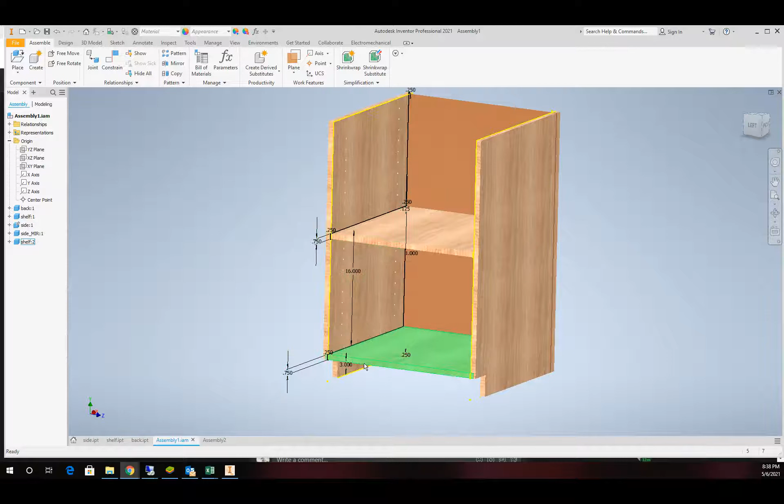So what we have is we're going to make a profile cut all the way around our side. We have some dados or some pocket cuts that we have to make for the back and the two shelves. And then we have some holes in here that we're going to drill out. So we'll have three different toolpaths to accomplish this. And so that makes the modeling a little more challenging, but nothing that we can't handle and get accomplished.

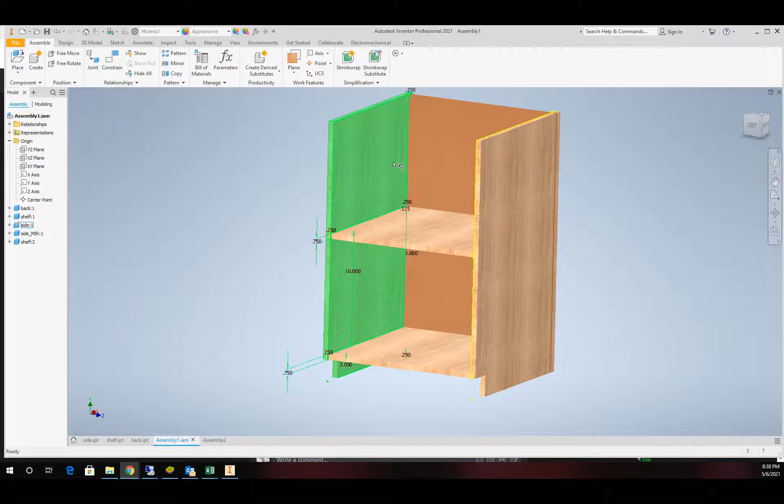All right, so I've created the assembly here. This is all the parts fitting together. Let's go ahead and take a look at the main component, which is the side here. So in the side, I have basically just drawn up a rectangle. Then I knocked out a hole over here and put some pockets in here and in the back, and then did an array or rectangular pattern to create the holes.

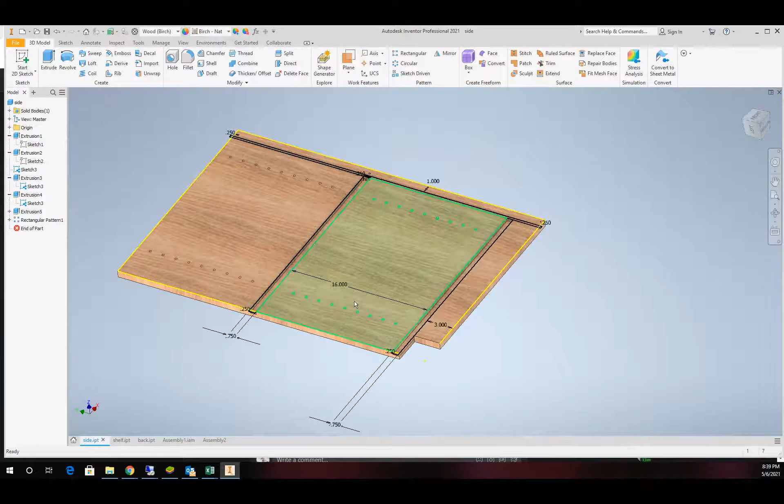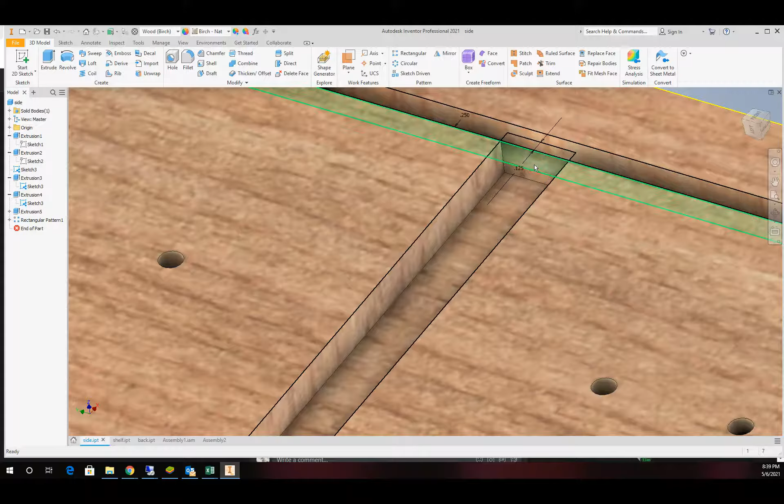So nothing too difficult. My dados are half the distance of the material, and my back dado is a little less. It only goes 1/4 inch down, or about 1/3 of the way through the material. And so that'll give us something a little more interesting when we make two different pockets. And it also lets us deal with what we're going to do right in this area on the pockets with the tooling. Okay, so the modeling is pretty straightforward, except I want to highlight a couple areas here.

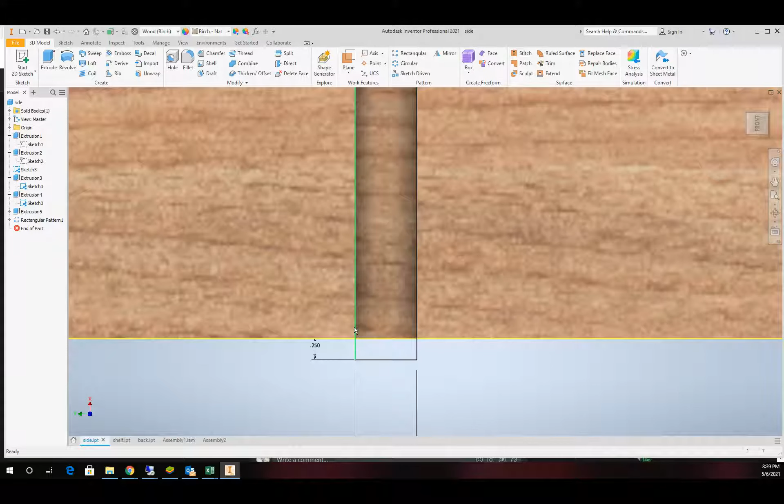For my pockets, I extended the closed group here a distance equal to my toolpath. I need to be at least half the diameter of my toolpath, but I went full width. That way I don't have to worry about it stopping short, and I can create a nice clean pocket with a crisp edge right here on the edge.

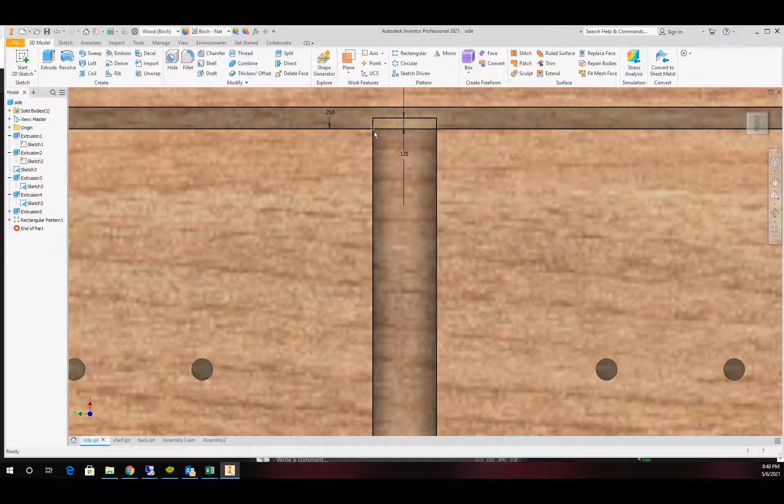I did the same thing on the back, but I had to make a decision. Which one do I want to go deeper? I chose to allow the shelf to go into the back, even though the back isn't as deep. I can hide that and make sure that my edge lines up perfectly here. If I didn't, I would have rounded this little part off, a little bit of that thickness difference between the two pieces. So that would have left me some other choices to deal with. Holes are pretty straightforward, and we're in good shape.

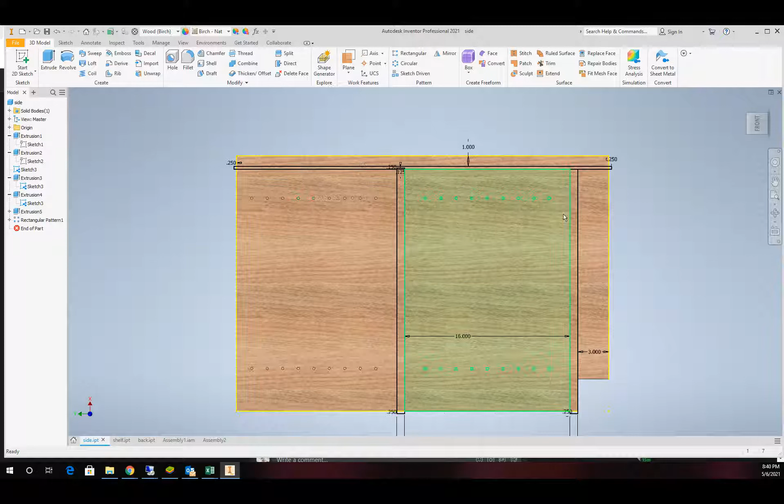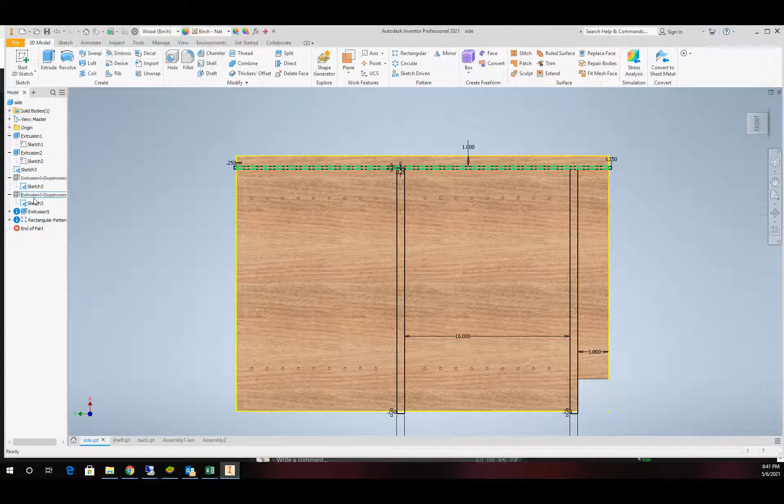All right, so before I continue on, I'm going to take my extrusions for those and just suppress them. Okay, that way I'll leave the sketch, which is sketch 3 here, which includes all of my pockets that extend beyond the body here. But I don't want to bring over all of this geometry. I don't want geometry on top of geometry. And that's really all I have to do.

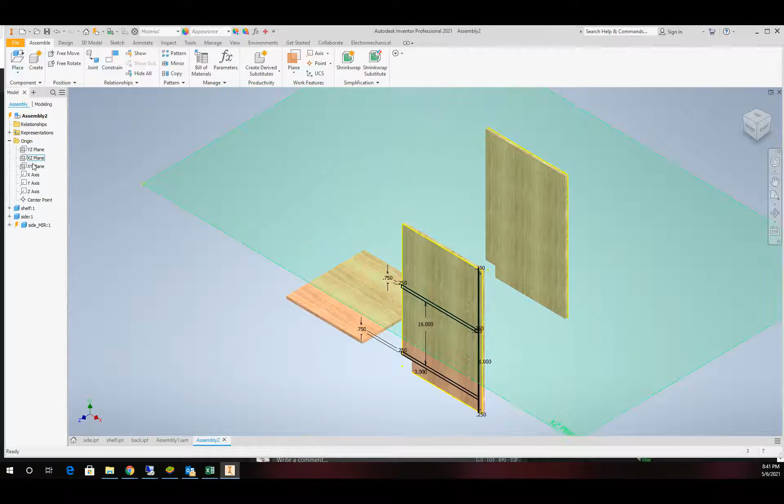So I'm going to go ahead and start up another assembly file. And I'm going to place in the pieces that I need, which will be the shelf and my two sides. Okay, once I get them in, I'm going to find an origin plane, make it visible, and I'm just going to constrain these pieces to lay them flat on there.

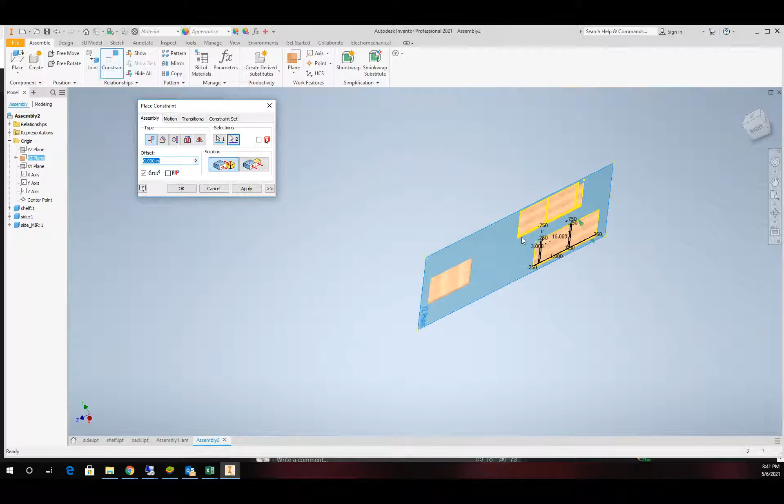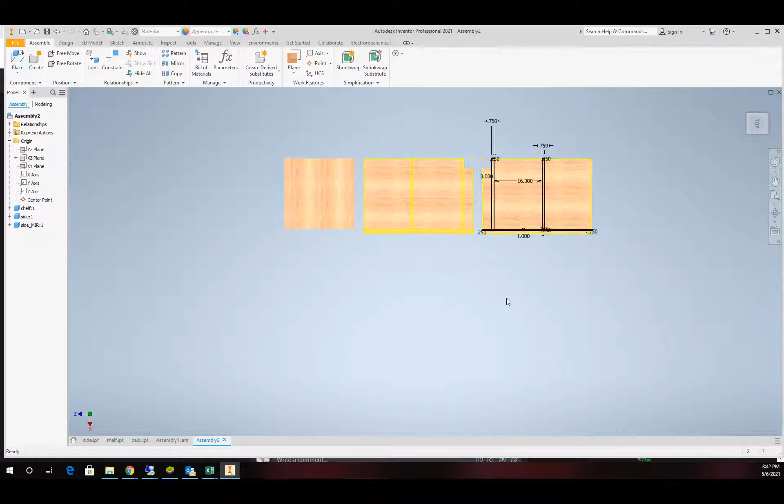I'm going to let VCarve take care of nesting, so I'm not going to get overly carried away with getting these organized and using the least amount of material. I just want to get them kind of flat on here. Okay, and that takes care of that. We'll turn the visibility of this off, and I can see my pieces.

All right, so at this point, very similar to some of the other videos that we've done, I'm going to take a plane and offset it off here at a distance. Doesn't really matter. And then I'm going to create a part. I'm going to call it cutfile.

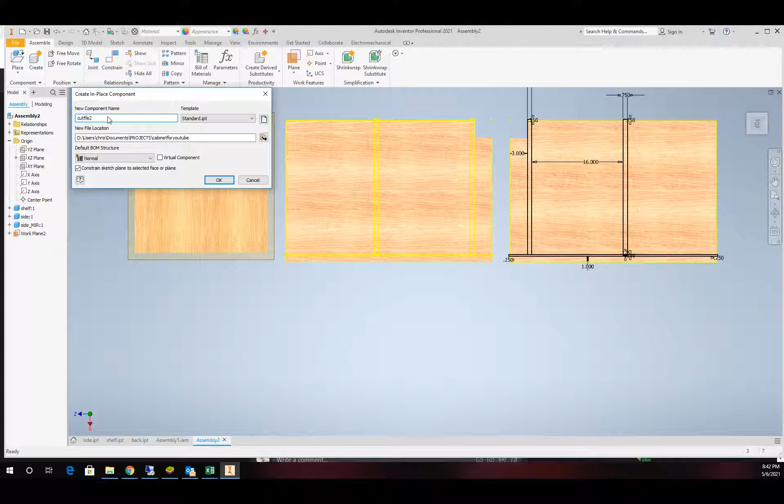Click OK, I'll place it on that work plane. From here, I'm going to create a sketch on that work plane, and then I'm going to project geometry.

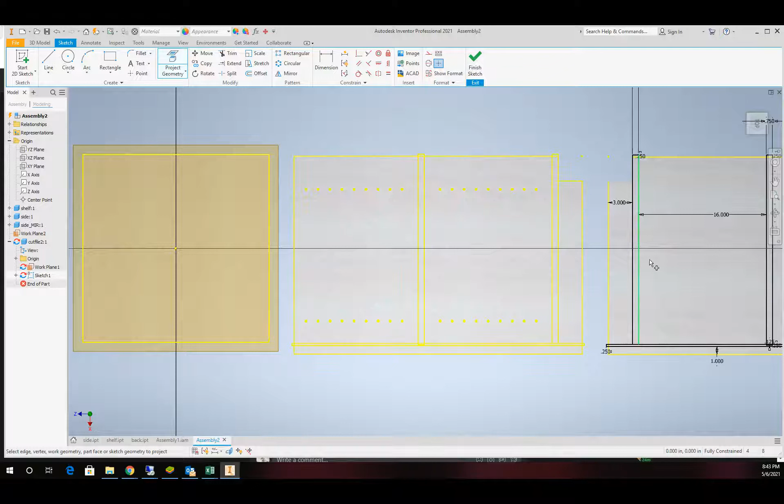So we'll start off with the shelf, then start with the body of this piece so I get the holes. Do the same thing over here. And I want to make sure I get my pockets as a closed body so I can see I don't have them there. So we'll go ahead and grab those.

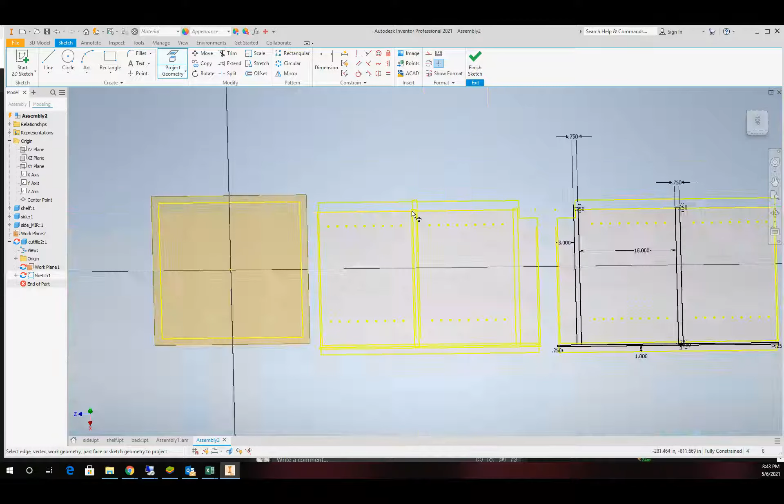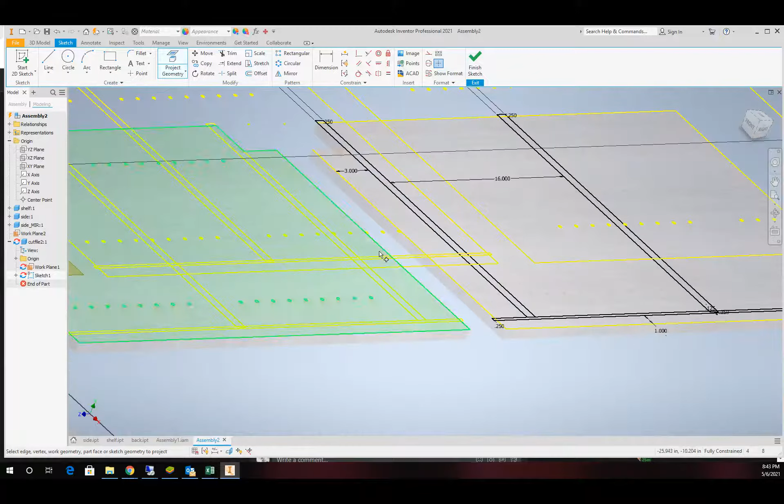Okay, gotta get that back. And we need to get this one. Okay, and we'll repeat over here.

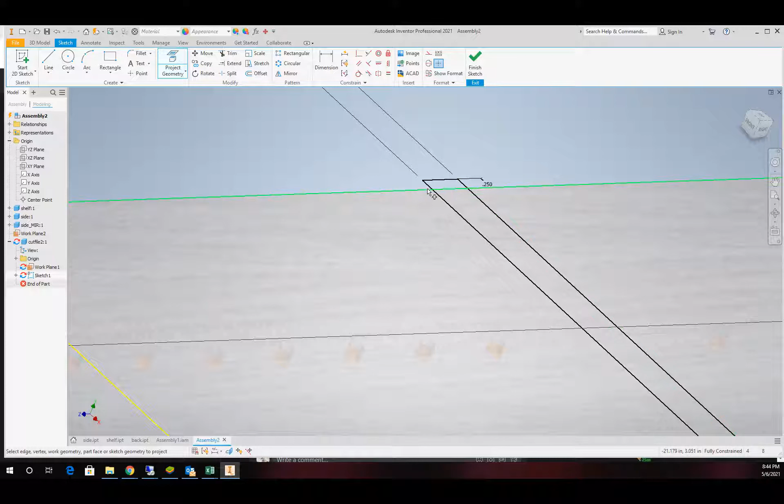I really don't need to mirror this part like I did in this part. I can do that in the software as well, so not a big deal.

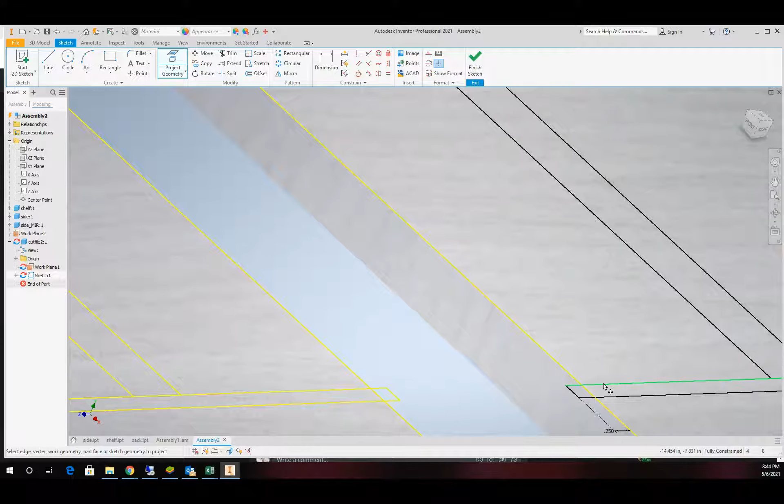Okay, that should take care of it. I got all my pieces. I do notice that I'm missing a piece here. I'll fix that before we bring it on over to the other software.

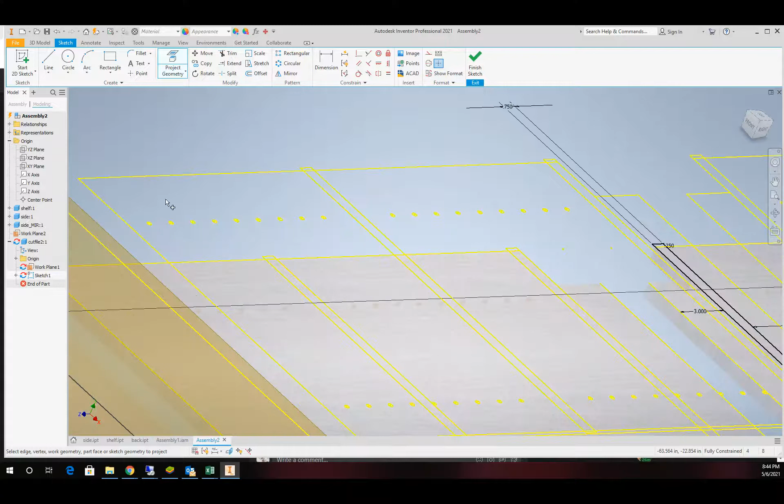All right, so this is just the key to it. I have the profiles taken care of out here in a sketch. I got all my holes. I got these dados or pockets taken care of. Everything's here, and again I'll just fix that little line missing here in a second.

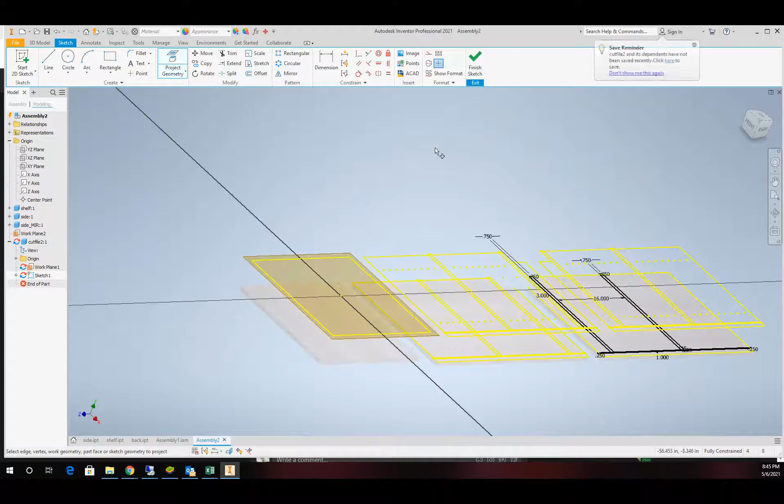All right, so let's just keep going. Once I have my projections taken care of, I'll finish that sketch. And then I'm going to go to find the sketch, and I'm going to export that sketch as a DXF.

In there, I'm going to make that a cut file and place it in my folder with all my other parts. This will be the actual file that I bring and open up in Vcarve.

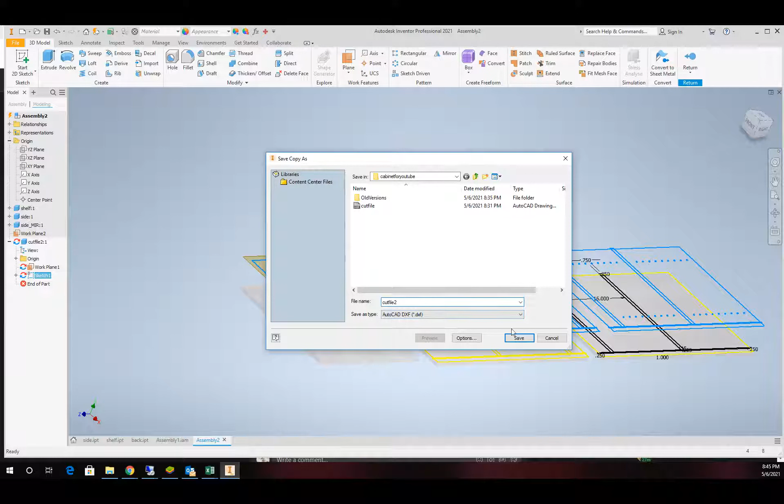Okay, so at this point I'm going to go ahead and close out Inventor and then go ahead and open up Vcarve, and then we'll go ahead and make the toolpaths.

Okay, so I've gone and opened up Vectric Vcarve, and this is the screen that we'll start with here. I've set up my workpiece for 48 inches by 96 inches by the thickness of my material. I placed Z0 at the bed of my machine. We have a Laguna M series with a tool changer, so that's the way I'm going to approach this problem.

If you didn't have a tool changer, then you would just have to make each of the tool paths separately and then do a manual tool change if you so desire with that approach.

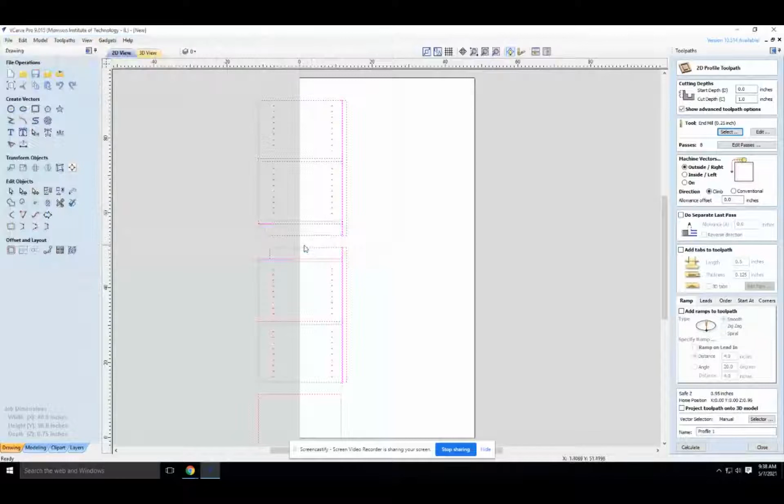From here, we got to bring our DXF in. So I'm going to go import vectors, and here's the file we made. Okay.

I'll just kind of bring them on over here. There's a couple choices we can do with this once they're here. I can allow it to try and nest.

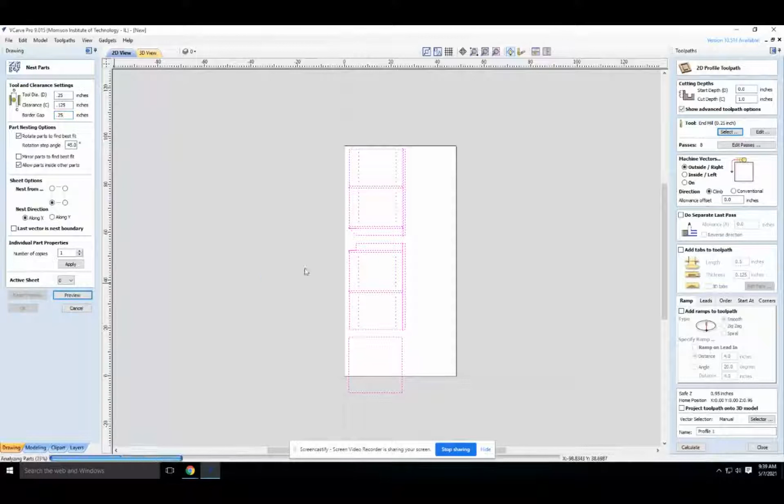So I'd set up my tool size at 0.25. I'll add a clearance of 0.125 and a border gap of 0.25. And I can hit preview and it will determine what it's going to do. That did not work, so we'll edit, undo. Okay.

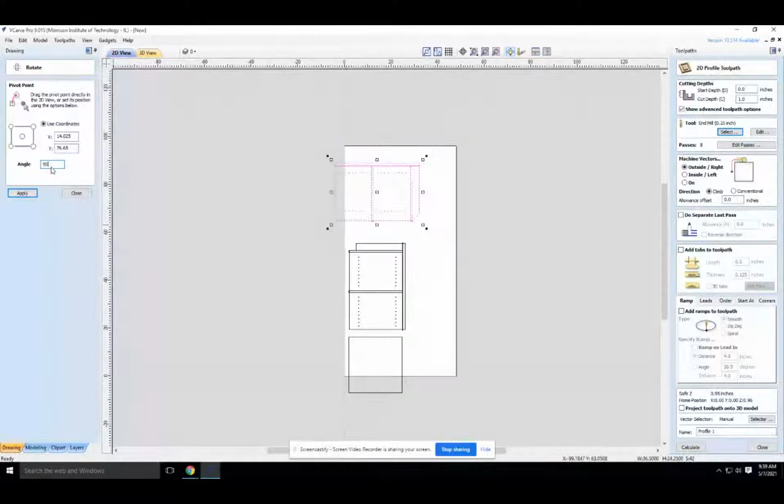So we'll manually do this. I'm going to take that part and we'll rotate it. We'll keep all the vectors together since I started grouping them together. And then I'm going to make 2 of these, so hopefully we can get them to fit.

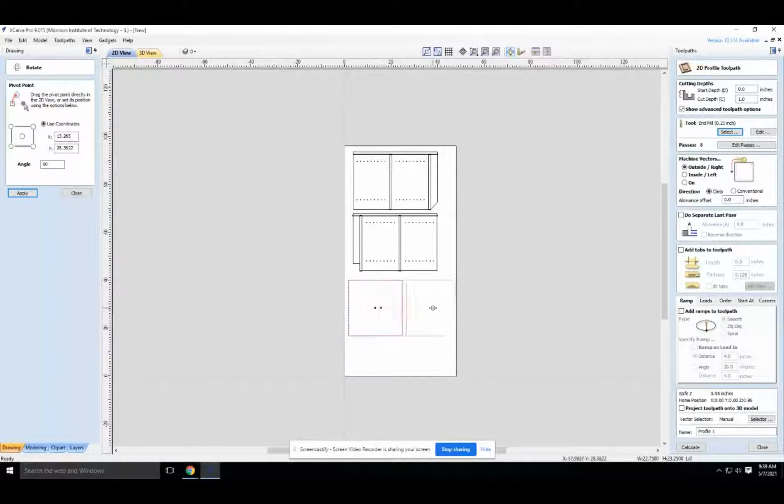All right. They'll fit just barely.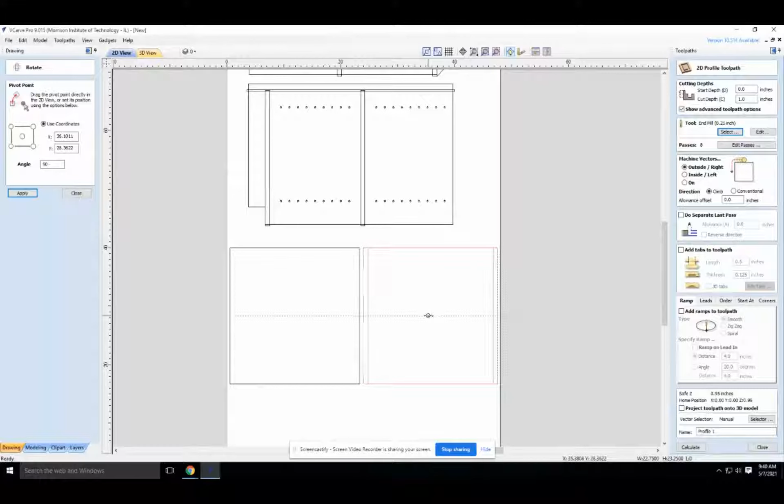All right, the next thing I'm going to do is come up here to the top, and I'm going to add some new layers. I'm going to use layer 1 as my profile cut.

Then I'm going to make a pocket layer. I like to add a color to it. And then I'm going to add a drill layer, and again I'll add a color to that.

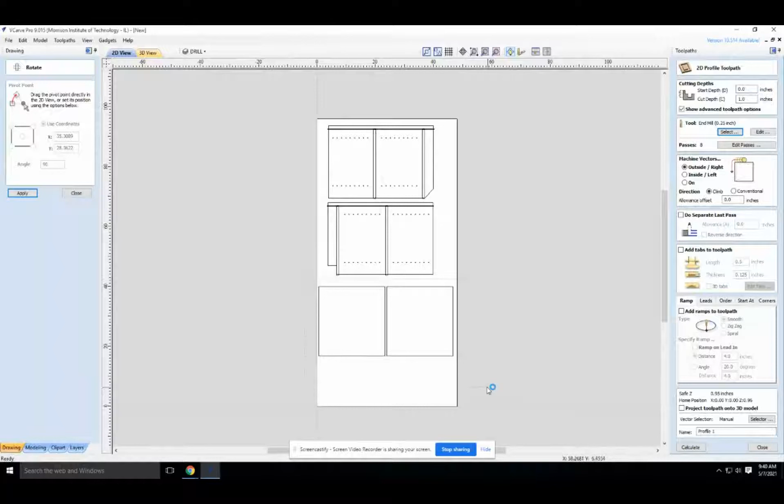All right, and then I'm going to take and start changing some things, by right-clicking, and I'm going to move them to the layer drill.

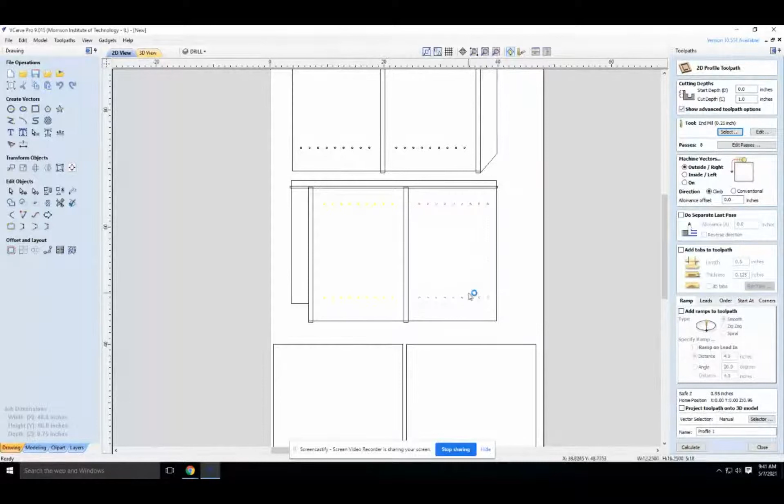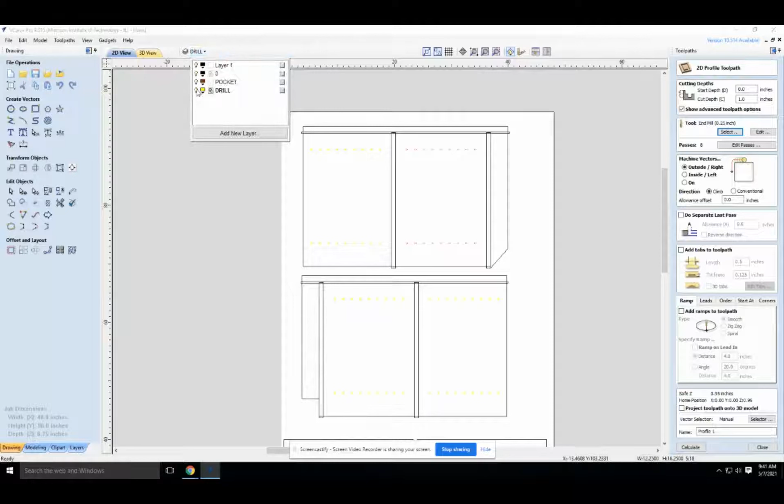Okay, I'm going to turn the drill layer off. And then I'm actually going to make another layer. We'll call this Pocket 2.

So that'll be for the back piece. And let's give that a color.

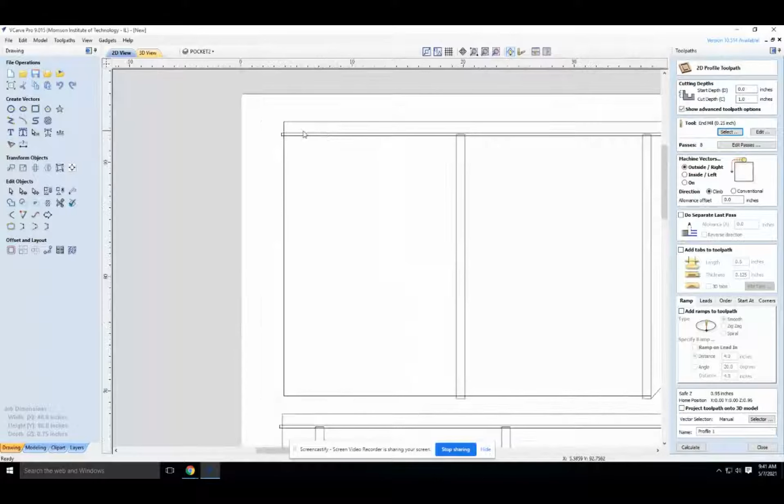Okay, so I'll grab those vectors. So that one went real well, and that one went real well.

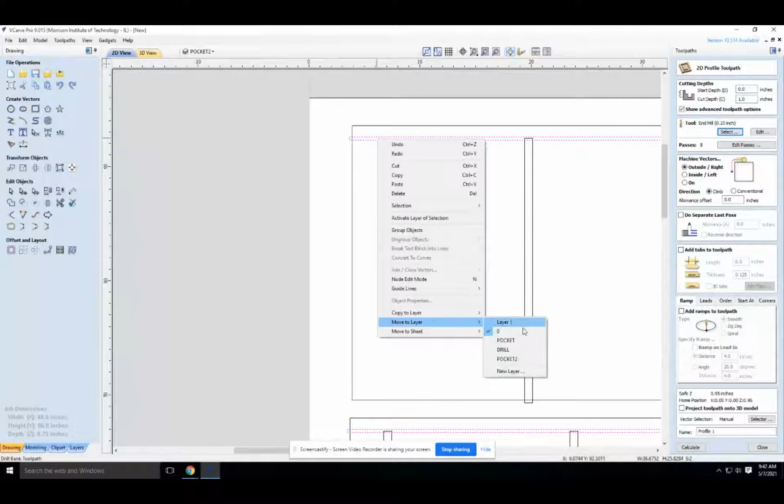And we'll change that to Pocket 2, and we'll freeze Pocket 2 as well, turn that visibility off. That leaves us the last one, which is Pocket 1.

That's weird. Okay, so something didn't come in with my DXF right here. So let's delete that, and we'll have to deal with that in a minute.

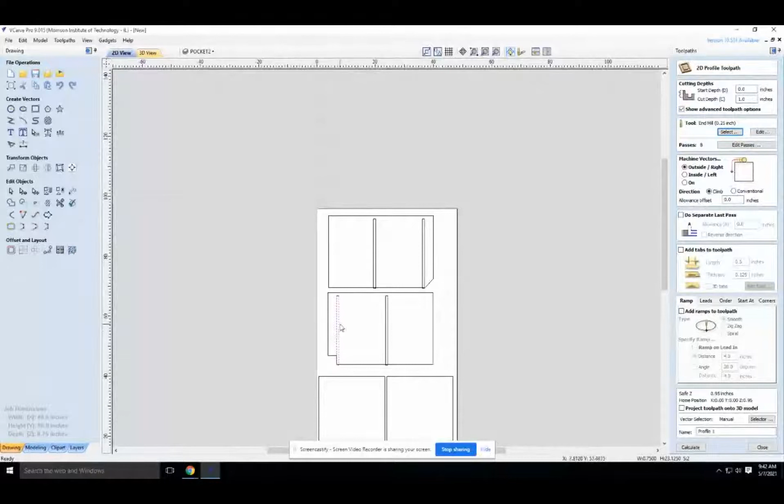We'll have to pull our layers back up. So let's just get these guys. So this one isn't going quite as well.

So once I have the pieces highlighted, I'm going to come over here back and I'm going to use join open vectors on those 4 parts.

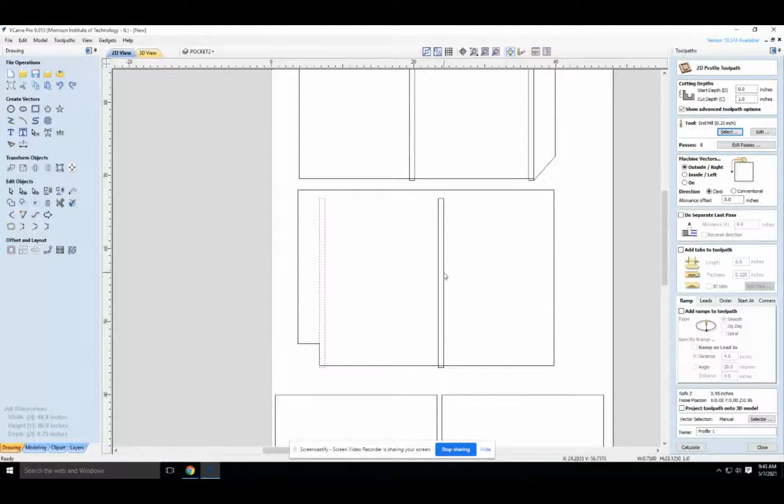Okay. That one's okay. Okay. All right, so that highlighted and this highlights, and we'll move those to Pocket 1.

Okay, let's delete this guy and make everything visible again. And I'm going to take this, I'm going to mirror it.

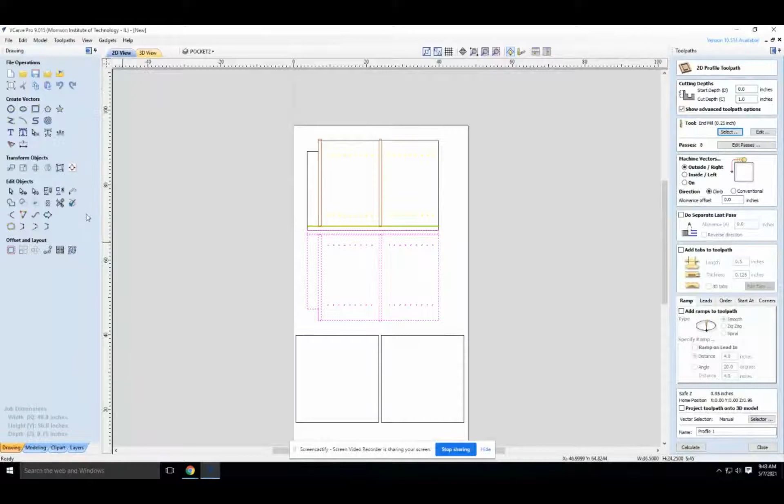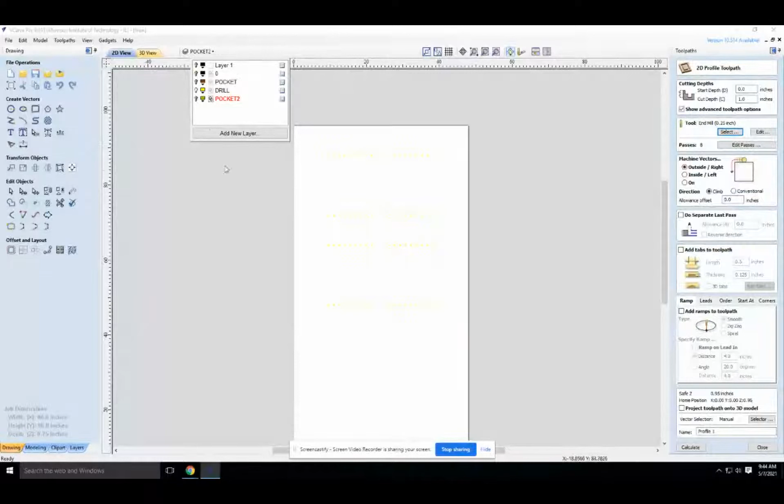All right, so now I have everything taken care of. So now it's time to go ahead and make our toolpaths. We are going to freeze layer 1 and the 2 pockets, and layer 0. Okay, so we're going to start with the drills.

In our toolpaths, which are always on the right-hand side of the screen, here's my drilling toolpath. I'm going to pick and highlight all of those. My start is going to be at 0. My depth is going to be at 0.375. And then I'm going to select my tool. We've already built our tool library based on our machine, and so we're going to pick our drill.

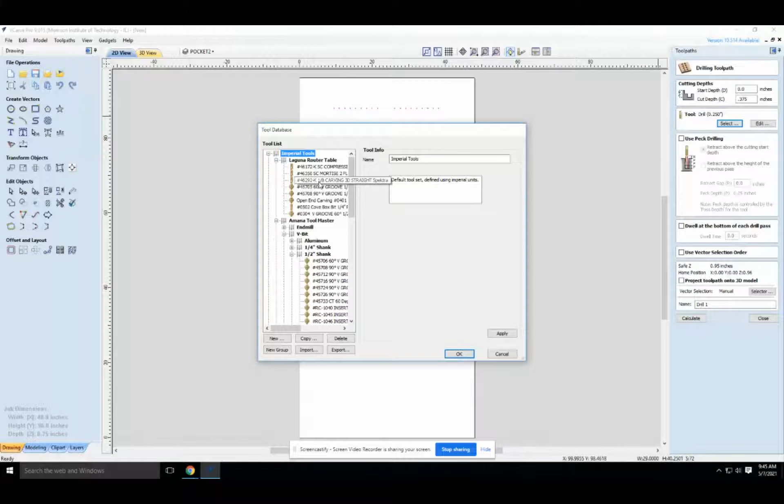Okay, and calculate. Okay, close, come back to the 2D view. Now we'll hide the drill, and we'll bring in our first pocket, which will do this.

All right, so those pockets, we're going to grab them and go to the second option here, Pocket Toolpath. And we're going to select our tool, which I need to use an 1/8 inch bit on this.

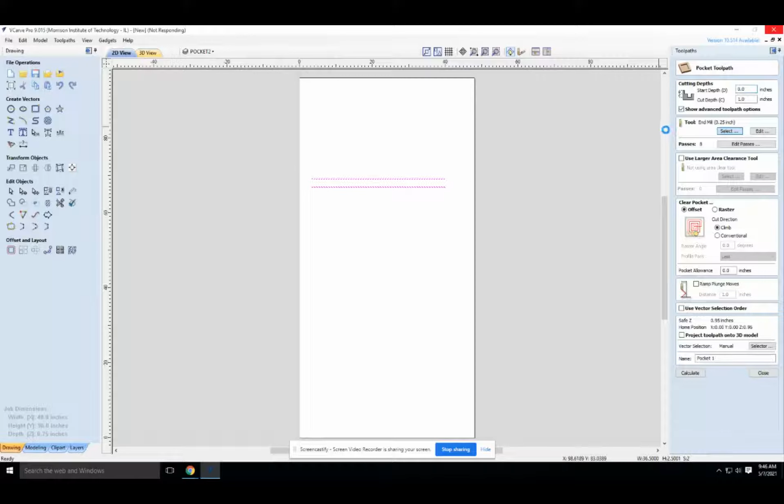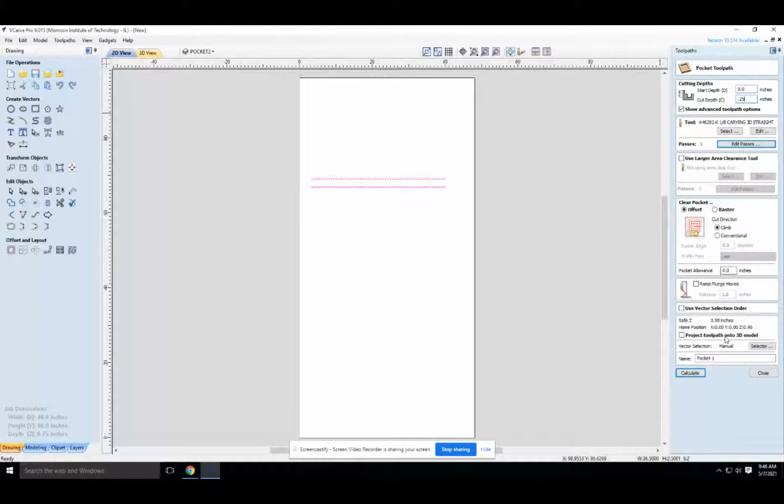Okay, and we're going 1/4 inch deep, so we'll just make it 2 passes on that, keep it nice and crisp. And we'll set that at 0.25 for our cut depth. We'll leave everything else as the default. Calculate. Now we have our second toolpath made.

Now on to our next pocket. Highlight them. Another pocket operation, this time I'm going to use a little bigger tool cutter. We'll use a 1/4 inch bit.

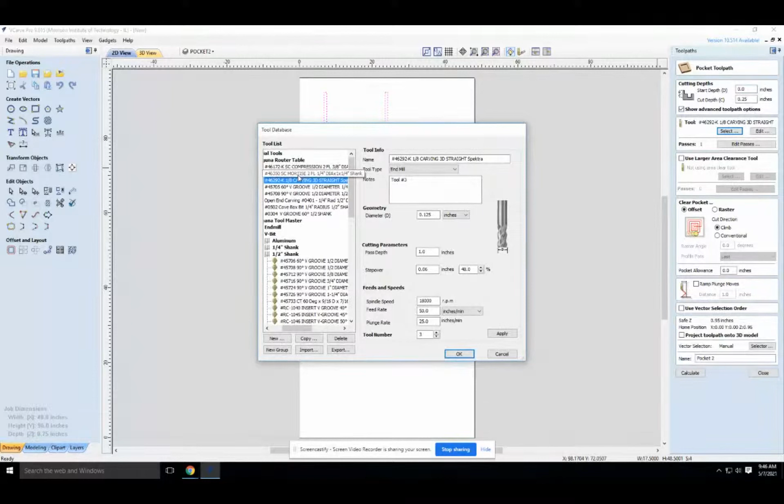Okay, we'll set our passes. We're going to go 0.375, so we'll do that in 2 passes. And change our depth here. We'll leave everything else as the default. Calculate. Our third toolpath is done. And we will freeze that layer, and then bring layer 0 back in.

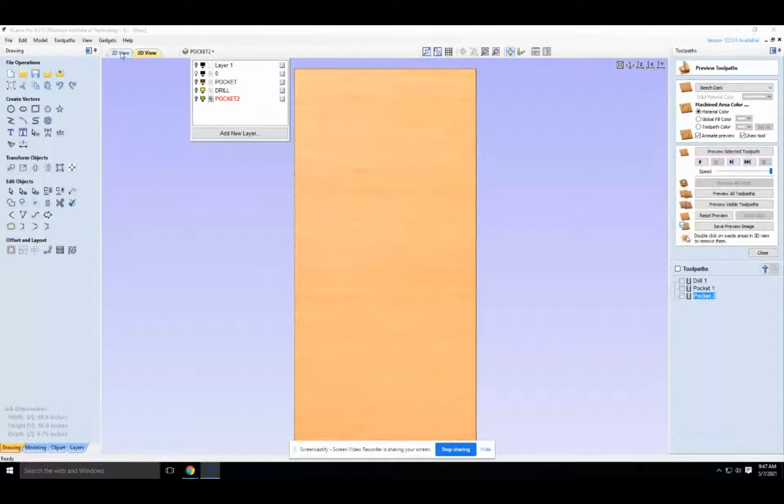All right, so I have a little bit of a problem here. It mirrored them too close together, so we're going to have to make an adjustment. I'll show you how to do that. So I'm just going to highlight all of those pieces.

And we'll set a toolpath. We'll use a 1/4 inch cutter. We'll go 0.75 deep, and we'll do this in 4 passes. Okay, since we're doing a full profile cut, I'm going to add tabs.

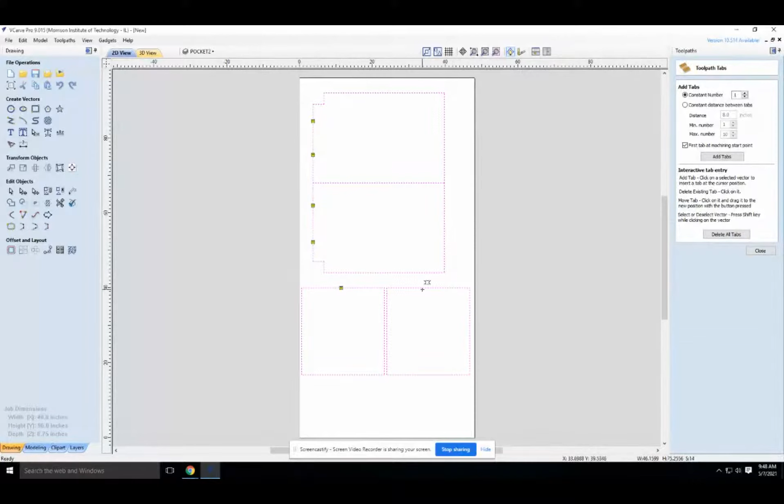By default, I like to shrink these down to about 0.375, and a thickness about 0.1. I hit edit tabs and then I can place them in. I also like to put my tabs where it's not that critical. Really 2 to 3 tabs each should be enough. If I don't like where a tab is, just unclick it. All right, that's good, that'll keep it from sliding around once it cuts all the way through.

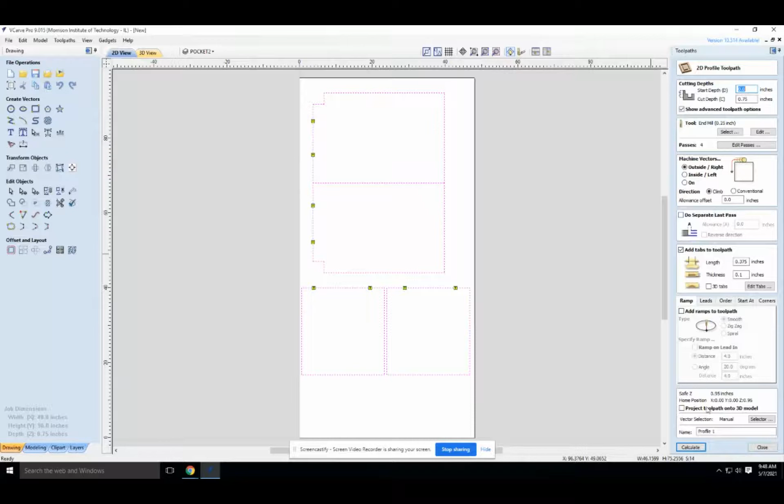Okay, all done, default the rest of the way. Calculate. Okay, so it did not like that because the parts were on top of themselves. So let's go ahead and fix that. In order to fix that, I need to bring everything back up and move it all together.

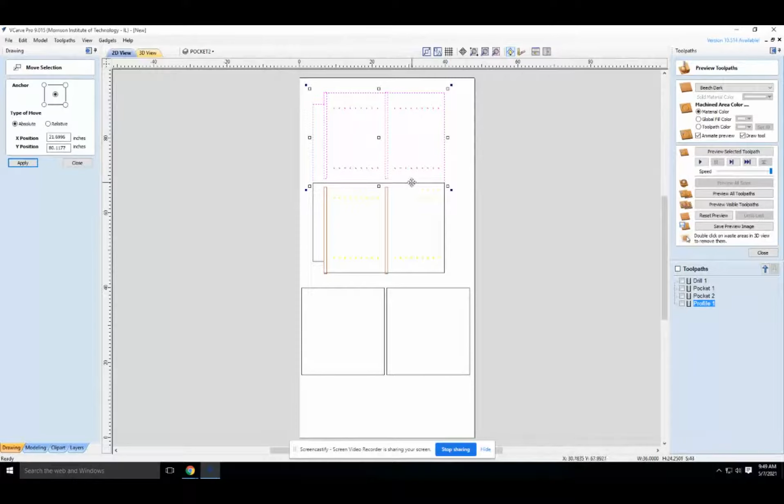So I'm going to take this piece and we'll move it. Okay, that'll be better. Okay.

Oops, I made a mistake. Let's undo. I left pocket 2 off. Okay.

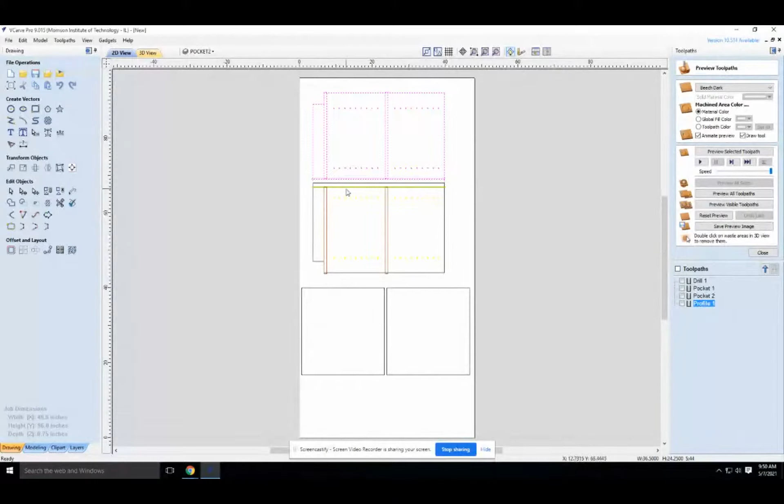All right, now let's go ahead and turn those layers back off. Okay, and then I'm going to go ahead and grab these and make sure they're joined.

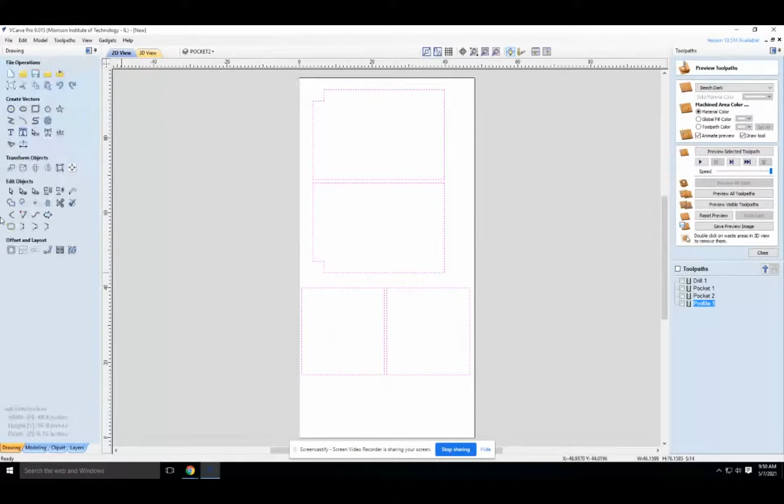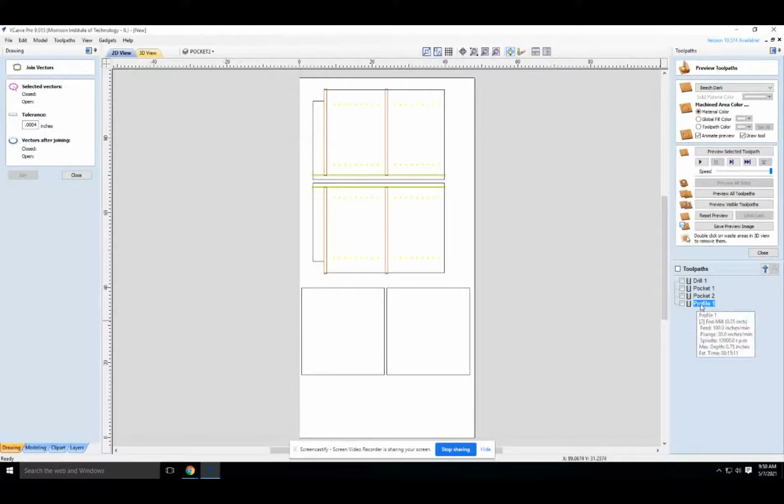Okay, so at this point, I don't need to remake the toolpaths, I just need them to be recalculated. So I'm going to pick all my toolpaths and recalculate all. That should do it.

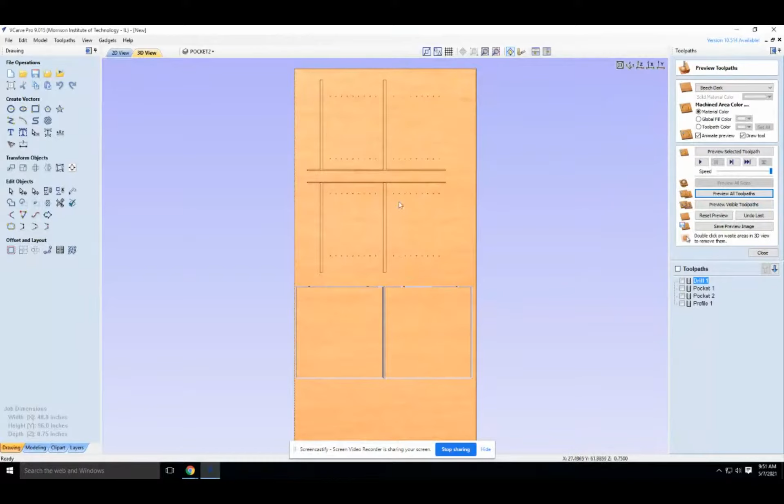Now we'll come over to this screen and let's just preview all the toolpaths. Okay, we didn't get a cut around here. So we will edit that toolpath and we'll add these vectors in. Calculate.

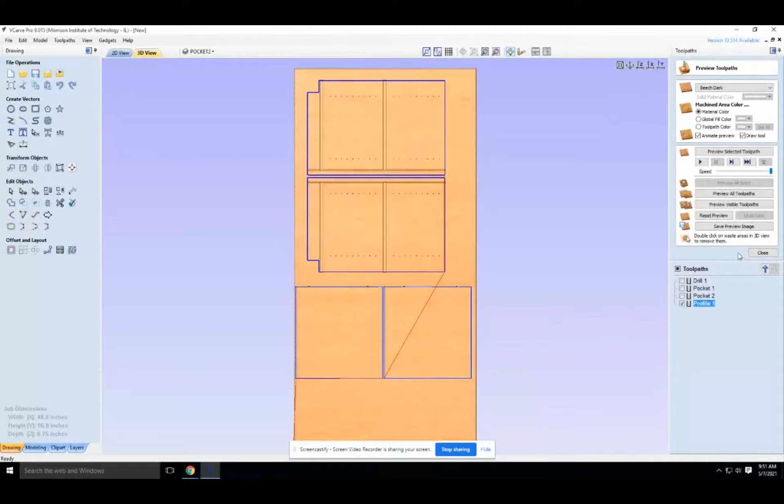Go back to our preview. And the easiest way is reset the preview, so we're back to scratch. And then preview all toolpaths. There we go, finished. So at this point, I'm going to highlight all my toolpaths, and then I can go ahead

and save my toolpaths using my post processor for my machine. Again, we're using a Laguna M series. And we just save the toolpath off and then move it over to our machine and let the machine do the heavy lifting for us.

So this is how we would take a DXF out of Inventor and do pocket cuts and drilling and all different operations from the single DXF and bring it on over into Vectric VCarve and then put it out on our CNC router. Similar process for plasma and some of the other CNC technologies for doing that.